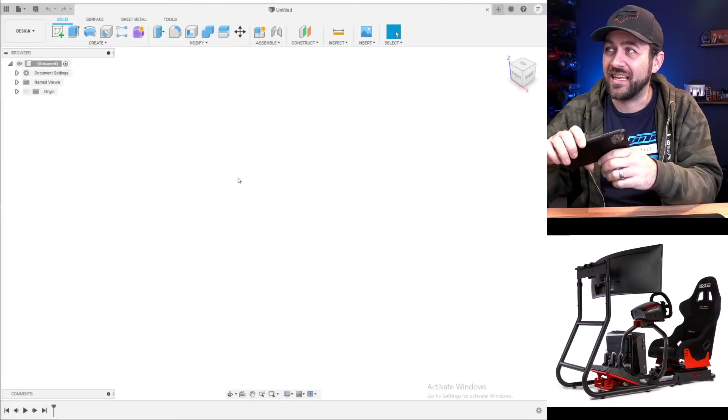Now I'm going to switch over to our Fusion example. This is the main screen of Fusion. In the inset right below me here, you'll see I've got a photo of a sim racer setup for playing video games. My idea is that we're going to draw up something like that, but we're going to make it a cell phone holder, so you can put your cell phone in it and that'll act as the monitor. You can use that for your scale garage, scale diorama, or just have it on your desk as a funny looking phone holder. But also it'll be a driver's seat or racing seat of some sort, so that's an option as well - you could just strip that out if you'd like.

You know, you could just strip that out of it if you'd like. We are going to do this as a multi-part design, so it'll all go together with multiple pieces. You'll print multiple pieces, and that's the overall concept of what we have going on.

Hopefully that made sense. This is going to be, if you're new to this show, I don't go through every step-by-step click of the drawing process. I kind of just go through it to give you guys an idea of how I draw things, more so than exactly every single step. It's a broad overview. I definitely suggest watching some good tutorials on using Fusion 360 if that's your plan, but maybe you'll pick up a tip or two here or there.

So here we go. Can I scale it up to really use it? You know what, you're going to need a bigger 3D printer, I'm guessing. So let's kind of just make some assumptions here. I'm going to start with a new sketch.

We click the sketch button at the top left. I'm going to go to the right plane, and do a little bit of sketching before we do anything, just to try and scale things out a little bit, give ourselves an idea. I'm going to think of a base, we're going to have this come up somehow, and then I'm going to use my iPhone Max as an example, and it'll pretty much work with anything. So let's call this thing, give or take, 80 millimeters tall.

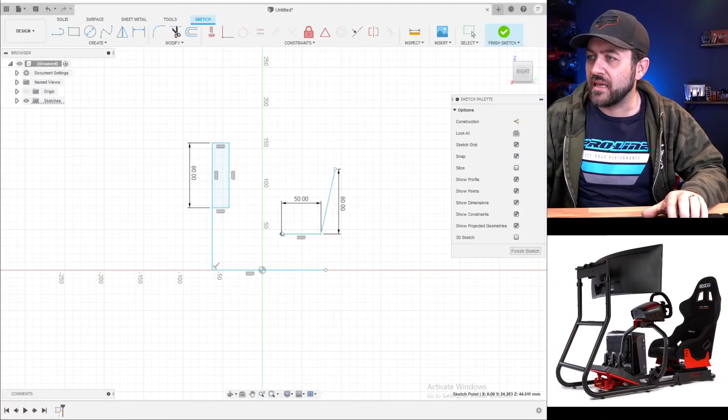And then a seat back - how tall am I? How tall would a high back seat be? 32 inches, something like that. 3.2, that's 75 plus 6, 80 millimeters, give or take. Oops, that's fine, we don't need to consider the angle. I don't have any angle on the seat bottom or anything like that right now - this is just for a bit of a sketch.

Now say we're going to have a steering wheel in here. What would a decent sized steering wheel be? 14 inches, so 1.4, 1.5 inches, 38 millimeters. I am going to adjust that one.

And that seems like too steep of an angle, so let's go 10. It needs to be somewhere in that range. I'm thinking something like that.

So this is the seat, steering wheel, and this will be our phone holder. We need to get our phone - the phone holder is going to have to be above that a little bit more so it kind of clears the seat. Something like that.

Hopefully that makes a little bit of sense. Okay, I'm going to end that sketch - that was just for my own visualization so I can get a plan of attack. I'm going to start a new sketch. We are going to start on the right plane again.

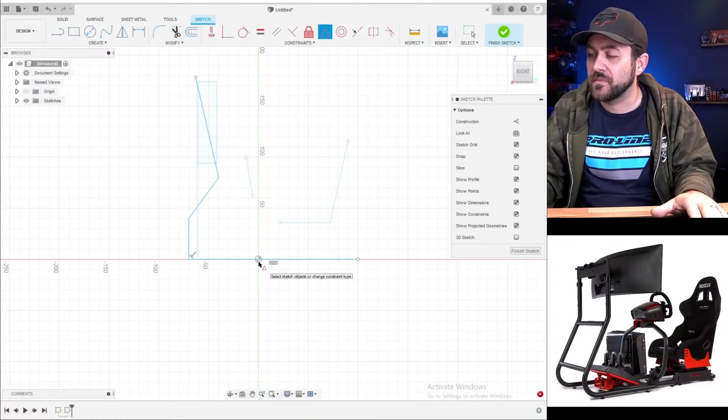And the other thing that I need to do is make sure that the base comes out beyond the top, or at least the center of mass of the phone, so that it doesn't want to tip over awkwardly. So 40 is fine there.

And we also want to make sure that this is going to fit within the bed of like an Ender 3 printer - that's super common, those are about a 200 millimeter base. So just want to make sure that everything sits there without any problems.

Let's do 180 millimeters tall. We'll go 30 - now we haven't defined any of these angles, and none of these angles are crucial, so I'm just playing around with it. That should be enough angle for the phone to sit without any issue.

Just add some brass - good comment, Moose Jaw. I'm kicking you out of the stream already.

So I threw that profile together. Let's throw some fillets in the corner - 10 millimeter, I'm already liking the size of it. Now that undefined a lot of my sketch already after I added that, but I'm not overly concerned about that. 90, there we go. So we're gonna throw one more in here.

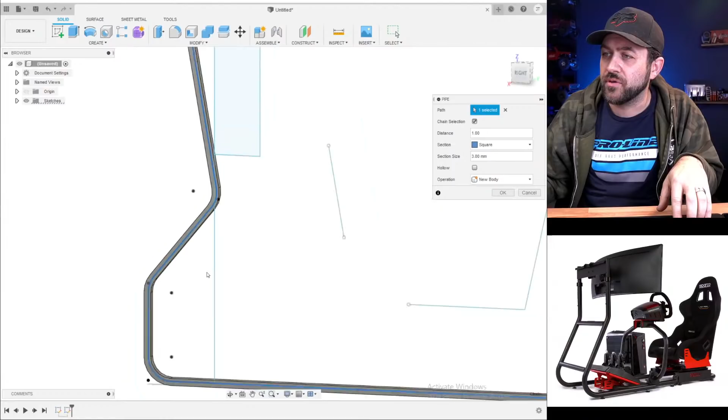That is not on by default, so we're gonna go back, grab pipe, and we're going to change that from circular to square. Then we're going to select that profile that we just drew, so you can see that's kind of a square tube design. Now currently that's a 3mm section - we're going to bump that up to like 5mm.

Actually, we're going to go more than that. 6mm is just under 1/4 of an inch. So, 6.5, that's just over—6.35mm is 1/4 of an inch. So that gives us that. Now we're gonna have that as will be either side.

I'm going to select that part and we're gonna move it. Now I need to create the 2 rails. So let's say that we make it 2.7 inches.

So if we move that 2.7 divided by 2 inches, will it do that? No, it won't. What is that, 1.35? 1.35, we moved that over.

I'm gonna do a move command again, or we could do a mirror command. We'll just do that. Drop down to mirror, select body, select that object, mirror it off of the center line.

So you can see none of this design is following the actual profile I created—again, that was the previous sketch. That was just so I could kind of get things into some sort of thought or reason. Now, of course, we need to connect everything here.

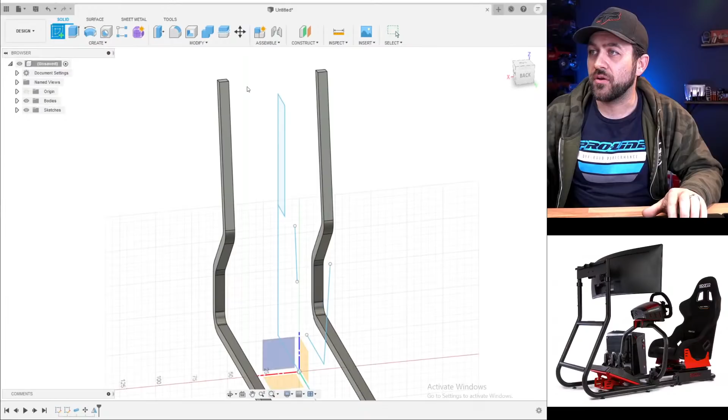What I'm going to do is we're going to start kind of at the top, and I'm going to plan on adding a couple of bosses. And then we'll add some around them. We're going to make those inner ones

2.6mm because those will be a threaded hole for a 3mm screw. So we're going to select both of those and click equal. And then we're going to make the outside, say 8mm. We're going to click equal and click on both of those as well.

I'm going to create a construction line by clicking L for line and then X to toggle it to construction. Make sure that it's vertical—it already was vertical. And just going to define it a distance off of 6mm off the edge, which is fine.

Now we do need to kind of define the measurements. 6 down is fine from there. And we'll go 6 up.

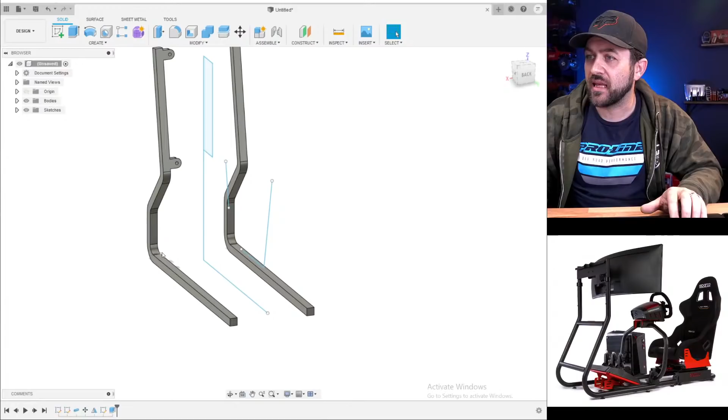So we've got that. I probably don't need anything like that down here, but I am going to need it along the base because we're going to need to come up with a pedal set as well as the seat base and all of that. So let's get it set up.

Actually, we'll probably do a mount for the pedal area up towards the front, and then the seat area will likely be more of a vertical tabs.

I think—yes, I did check if I had audio because people... oh, dang it. That happens to be the joke around here. I don't know how that happened, but people trying to freak me out that I don't have audio.

So 2.6, we are going to kind of mimic the design that we did a moment ago, up top. I'm going to make sure that it'll be a little bit different. I'm going to make those—none of these dimensions are critical. So I'm just making stuff up as we go.

Line between them, create some points, and turn off the construction. Two more tabs. We're good to go.

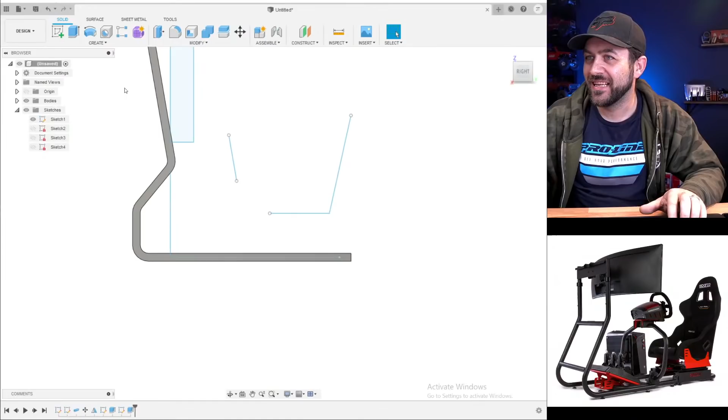And now for the rear portion, actually, I'm going to turn that sketch back on for a minute. We should probably make the seat base adjustable so it can slide. Just because we like to overcomplicate simple things.

We're going to go 8 again. Now, this one, we're going to raise up. I'm going to give myself a little bit more clearance. 25 and 40.

All of this stuff will, again, we'll start making all of our additional pieces here shortly, but I want to try and get my framework down. As we go, we'll definitely add in fillets and radii, possibly some more style to things, maybe some additional bracing, who knows? But like I said, these things usually tend to evolve as they go.

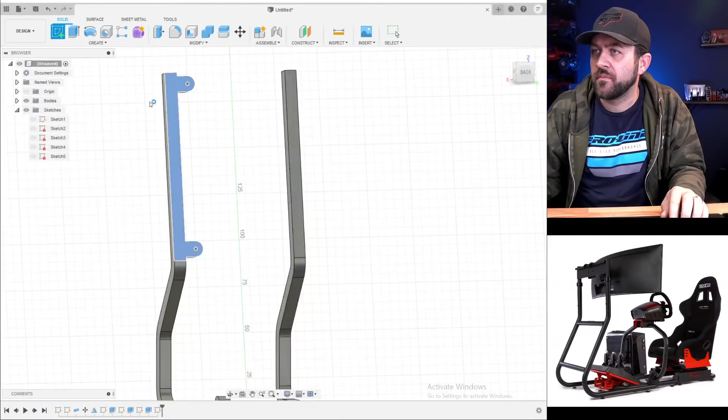Okay, let's do the phone holder next. Yeah, why not? So this doesn't have to be an overly complicated part, although that is typically how I do things.

So we're going to bring this just proud to the top of that, maybe 5 millimeters, again doesn't matter. We're going to do a collinear constraint with the bottom of that sketch and the radius return of that tube. Now you'll notice I drew this to the center line because my plan is to just draw half of this and then mirror it, that way I don't have to do as much work.

Now we don't need this thing to do the whole width of the phone. Really, we don't need to do much wider than the base as it is. So my phone is about 160 millimeters. But let's keep this - if we do 50, that'll be just past. That'll be fine, we can mirror that to each side.

Now we do need to add some 3.5 millimeter holes over the - you're gonna need some flathead screws for these probably. Actually, I'm going to delete that collinear because I'm going to need to put a foot on the bottom of this, and I don't want that screw head to get in the way. So we'll put 5 millimeters there too.

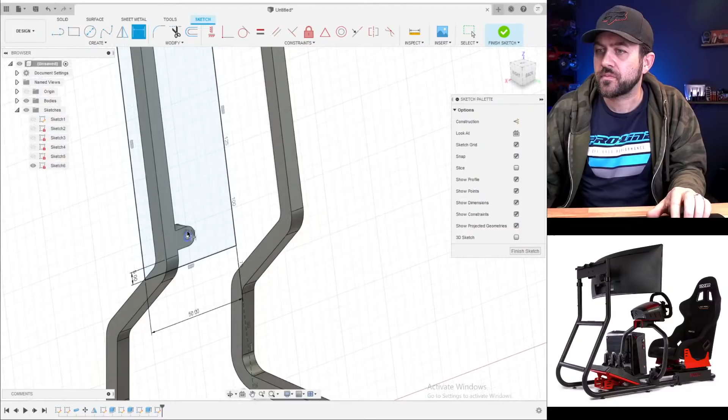All right, let's do an offset inside 5 millimeters, like that. And I'm going to do 5 millimeters out this way. I'm just kind of creating some geometry for the sake of creating geometry.

Lastly, I'm going to do a construction line set like that, and we're going to do 2 offsets. This, I'm going to do 2.5. I'm going to make sure that's not a construction. Hit OK, and do one more time, negative 2.5.

Okay, so now I'm going to hit Q, and I have to grab all of the areas of this sketch profile that I want to include. I want to make sure that I've got - all right, and I'm going to increase this distance from 50. We're going to go 4 millimeters out is all.

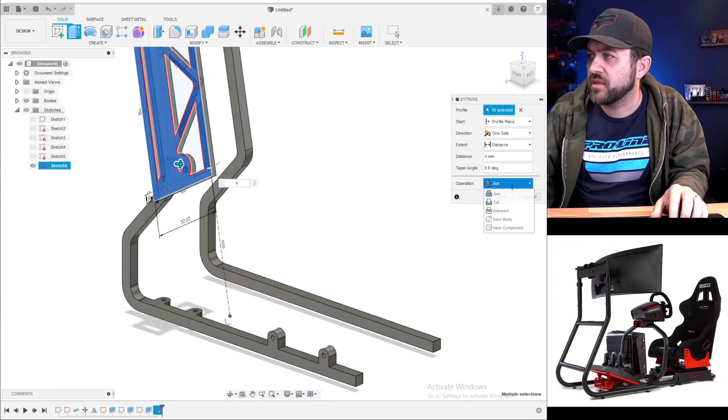Oh, but we need to make sure this is a new body, not a join. We got a little spot there we missed, but I'm going to go back in and edit that last sketch, change a couple of things to change our style. Added a little bit of width, just kind of, I wanted to add a little bit more separation here on the outside.

I still don't like that. I'm going to change - oh, that one's fine. It's this one here, I'm going to change that to 2 millimeters. Once we add a bunch of fillets and things like that, that whole thing will end up looking much different. So, actually I don't need to do that yet. Let's add the foot portion at the bottom.

Before we do it, I'm going to add a bit of color to this, so we can make sure we know the difference in bodies.

So I'm going to put a collinear constraint on that bottom edge. This is what is going to need to come out the thickness of our phone. Now mine is 12 millimeters with a case. Let's go to 15 to fit more thick cases.

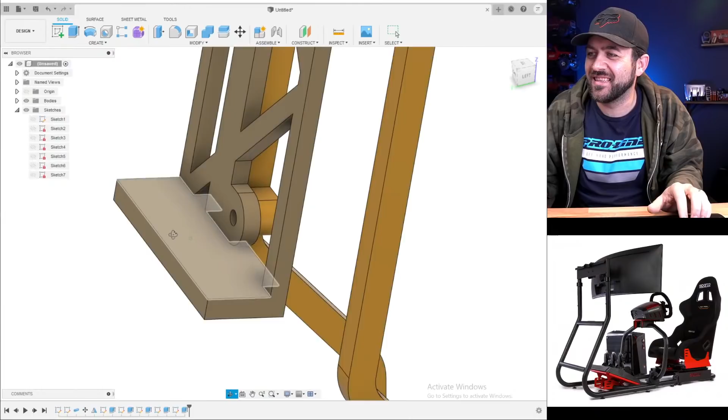And then lastly, we're going to put a lip on the front. I think we can get away with 4 millimeters without much concern. That we're going to need to come up - whoops, that's going to need to be -8, I guess. We'll go with 10, -10.

So we've created that. Now I'm going to mirror that body, selecting the body. False, I'm not going to do that yet. I'm going to decide to add the fillets on this thing first, so I don't have to fillet both pieces and all of the joints that would be doubled.

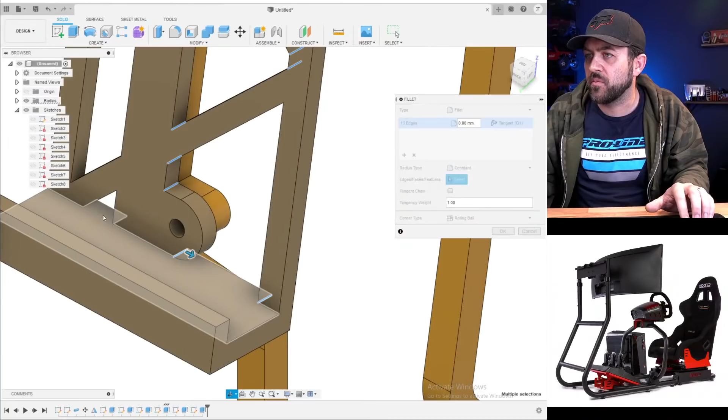So I'm going to go through and select all of these. There's multiple times you could do this - you could do it in the sketch, you can do it in the solid. Some are more of a pain in the butt than others. Either way, there can be a lot of these lines and they can end up taking a good amount of time. But we'll change the look considerably if you spend some time selecting and getting rid of a lot of those hard edges.

So what's 3 millimeters? Oh, it's not gonna... okay. It doesn't want to do it because I'm guessing there's some of these that are too small and it wants to close up the joint too much. So I'll do it one section at a time.

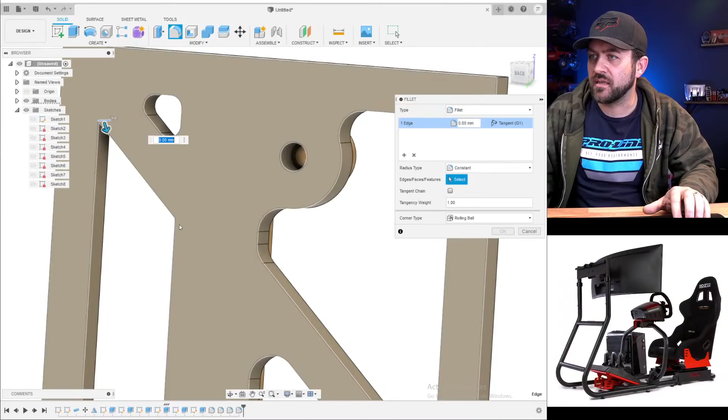All right, you can see it helps, it starts to clean things up quite a bit, fairly quickly as well. So if I do 3 here, yeah, that's the one that's starting to close up. So we're going to do 1.5. I kind of had a feeling that that was the area that was causing me issues already.

And we've got a duplicate of that one down here, 1.5. It didn't grab that corner. Let's redo that one more time.

Okay, so now I'm going to mirror that. That body, mirror plane, we'll just select that edge. I'm going to hit new body rather than join so it doesn't connect with that other side. Then we're going to combine both at once. There we go.

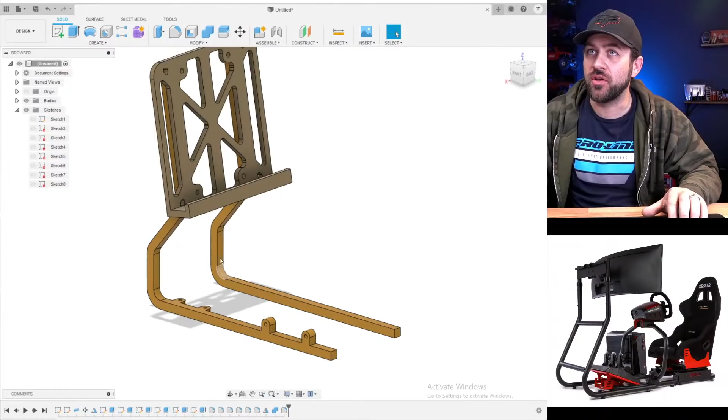So there's going to be your new phone holder. Now we need to do the pedal set, the chair, make sure whatever kind of chair base we do, it's got some...

Save before mirroring, I should save just because. What were we calling this? Sim Racer phone holder. So there we go. All right.

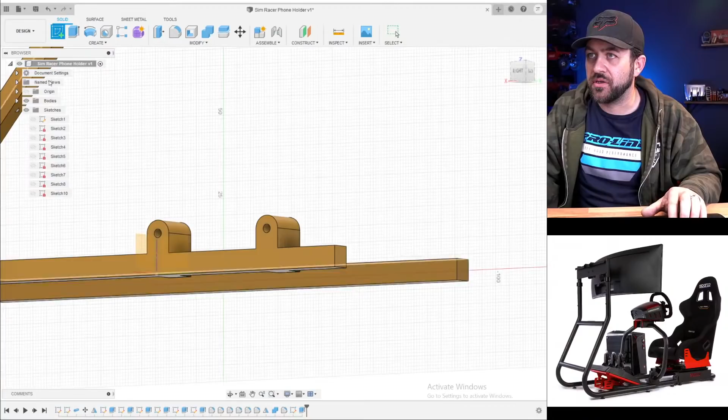Now we're going to do that because I want to cut it from the outside. I want to kind of have the outside of the rails flush with the... there we go. Now we're going to bring that in. Yeah, we're just going to bring it in negative 6.5 since that's the thickness of the tubing.

I told you that footprint gas pedal would come in handy. Hey, you know what, you're not wrong. We have a full pedal assembly, I believe, from a previous model that may work out just fine tonight. So we will go back to that.

Use the Woods Runner seat. Oh, could use the Woods Runner seat if people wanted to buy it. Insert derive, we go down to Woods Runner. Did I do that all separately?

Floor stamp, rear firewall, nose. I don't remember how I titled it or anything. It was like, I think I did a whole bunch of the interior all together, actually.

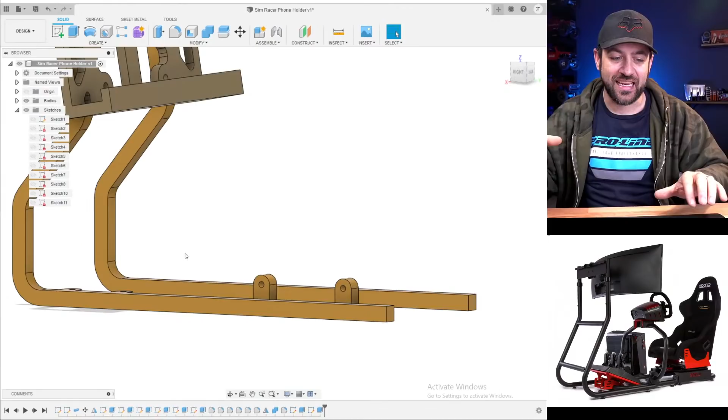I'll make this so that there's a solid base and then any seat could be bolted to it, or double-sided taped or whatever you may have that could come in handy. So, 3.5.

Oh, actually, I'm going to undo that. We're going to make these slotted because everybody loves the slots. Slot, slot. Turn off construction, 3.5.

All right, now we are going to select the line, select the midpoint, and constrain those so that they are equal. Lastly, we're going to do 8 millimeters of adjustment.

Oops. We're just going to do an equal so that... yeah, why isn't this one? Oh, that point did not want to. Oh, nope. Oh, I'm just going to hit P for project so we can grab that. Sometimes it does not love the little things.

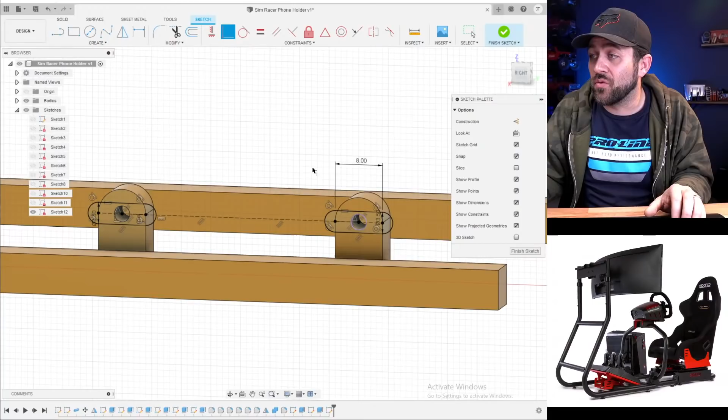I just don't want to assume that people have an item already, other than a phone. I'm assuming you all have a phone, but you might need the phone to take the photo of it. So maybe you're going to have to borrow your wife, girlfriend, or kid's phone.

So we're gonna work on, there we go.

Okay, who has Wraith seats? I just have a box of drift cars, have seats? I didn't think drift cars had full interiors.

But that is good news because I'm sure that the seat that I draw isn't going to be beautiful. I'm going to open up that original sketch or turn it on so I have an idea of where I was previously thinking this seat base needed to go to.

We're going to leave it a little shy of that height specifically, but add some tangent connections. I'm going to do a vertical line, that was purely to give me a good area to dimension off of. Did a 20-degree on the front side and a 10-degree on the rear side.

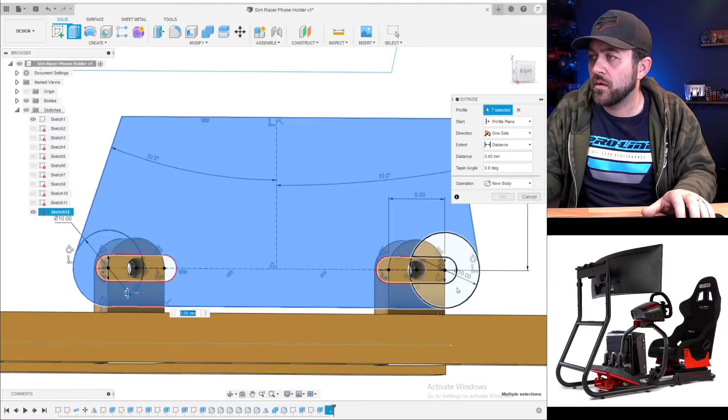We probably won't pull in another one just because I don't like using somebody else's work like that on a stream, especially. So we're gonna go 5 millimeters out.

And at this point, now I made that a flat base, which is probably not what we want. We probably want it to have some angle in it, right? So I need to go back and adjust that sketch.

So right there is our horizontal constraint, you can see that little line segment. I'm going to delete that. And then I'm actually going to delete that, that was a perpendicular constraint right there. And it's still, I need to take off that 20. All of these things that are defining... oops.

So I'm going to throw an angle. There we go, drag it down for a little bit of an angle, and then I'm going to be able to do, let's say 5 degrees. That's reasonable, I think. 5 degrees might be a little extreme even, but probably be all right.

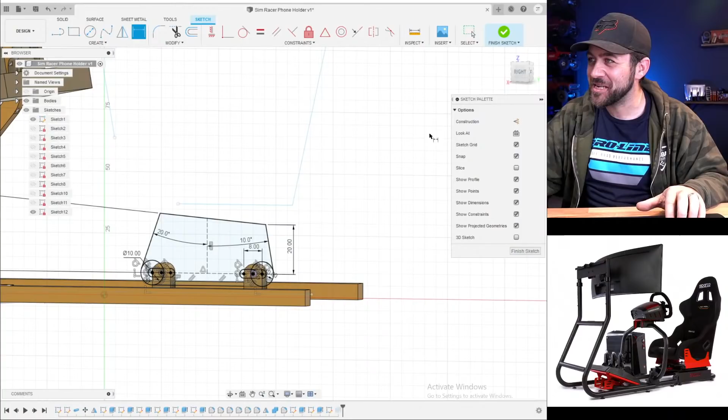And so, finish that sketch. So now it adjusted our seat base to have the angle.

Throw a small amount of fillet on it already, just to give us a taste of style. Just a taste. Now, I can make this so that it's a full C shape, and I think I'm going to do that. Yeah, it won't really, we'll still be able to 3D print it. It'll actually make it a good example too for something to print, because it's going to be one of those examples where you can orient the print in a different way and save yourself a lot of time and energy.

So we're going to, now this part I need to extrude it, but I would like to extrude it to the right plane. However, the right plane doesn't show up. So unless you click on the origin eyeball up there, and then those little things pop up, and then you can click on it and it'll take you to that point. Bam. Let me turn that back off.

So now with the position of that steering wheel in the photo below me, it is not attached to the steering or to the TV area, but I think for our purpose, we're going to build that whole steering column off of the phone holder, because this is a 3D printed scale item and not an identical model to a sim racer. So sue me.

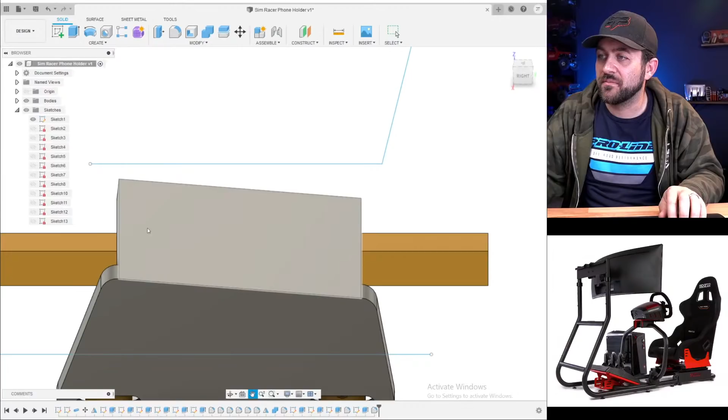But let's, before we go, add some of that. I'm tempted to want to put some decoration in this, but at the same time, I think I'll leave it just to give it a flat base so you guys can attach either the seat that I'm going to draw, which is going to be top notch, or give you an easy way to mount whatever you plan to do. So I am going to mirror this body already.

And new body, not a join, because otherwise it'll join to this whole outside part, which I don't want. Or it could, maybe it wouldn't, I don't know.

Hey Josh, my girlfriend got me one of those shirts for Xmas. Oh, nice. The Proline shirts are really nice too. Put HD on it. Oh, we will definitely put HD on it. We'll have to figure out a place.

I might have to go in some oddball place on this one, because we're not going to have a lot of nice big flat areas. Maybe I'll put it on the area where the foot pedals will go.

So I don't know that we're going to need any other cross braces between the two sides, are we? That's going to be plenty.

I might add one other one. I'm not going to mirror it yet. Side of the seat stand, great idea, Phoenix. I like that one.

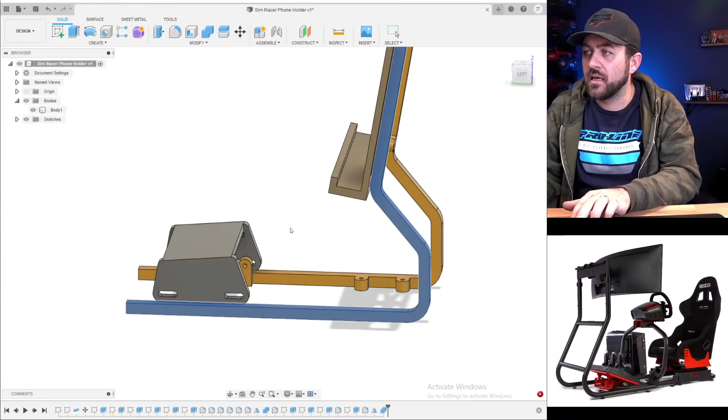I'm going to open up the bodies. I'm going to delete that second rail and mirror the first one again, just to give myself an updated and complete look at what we're going on.

Josh missed a good opportunity. A shirt saying, I wanted a VS410 Pro for Xmas, and all I got was this trash. Nice, I like that. That would have been good. I agree, but I'm not that clever to come up with nice shirt designs.

Okay, now I'm going to work on the pedal base. One thing I'm noticing already is that here I've got these holes sized to be the threaded holes for cup holder. That's a good idea, Darwin. We'll add that.

These are sized to be threaded. So that means that the screw would likely have to come from the top, otherwise it wouldn't sit level on the ground. However, there's things in the way of almost all of it, so that would be a tough thing.

So what I'm thinking is I'm going to adjust that sketch and make those sized for a 3mm pass through. And I have an idea how I'm going to. So this is going to be 3.5 mil, and same with that one. Hit finish.

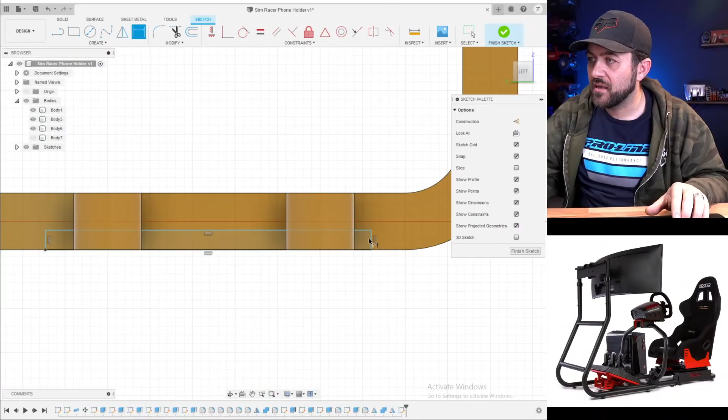So we're going to do 2.5mm tall. I'm going to use P for project to grab those. We're just going to do collinear constraints. This is unnecessary, an undefined sketch would have worked fine, but I'd rather do it the right way. It's grabbing that whole thing, so we're just going to turn that off.

Oh, it did an offset face, that's not what I'm trying to do. So we're going to cut through all of that like so. And now I don't have that mirrored on that side properly. So that's why I don't love to mirror those two things.

Don't say we need supports. No, I don't, these pieces shouldn't need support. Well, these little areas right here are going to need some supports, but that's going to be about it. This thing's going to print pretty well without any of that. The whole thing, I kept that in mind the whole time. This is going to need very, very little support. That is my goal most of the time when I'm designing, is try to minimize supports.

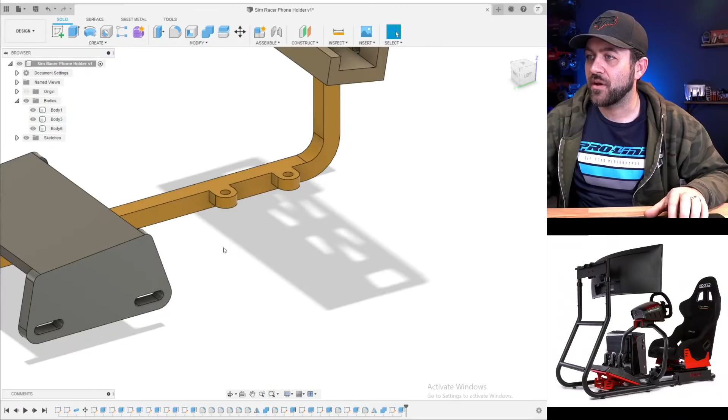So I am going to delete that just so I remember to mirror it again though. Now we're going to work on the pedal base. 2.5, these are going to be the threaded holes. They're going to, like I said, thread up from the bottom.

And a couple of constraints. We'll bring that in, but I'm not going to bring it all the way out to the edge. We're going to leave it shy, going 3mm from the edge.

Josh sent Dale's truck to Phoenix. I don't think so.

So now this, I do need to get that. There we go, there's my origin. So we're going to do... we're going to extrude. Oh, we didn't grab the full inside of that. Otherwise we wouldn't have gotten those threaded holes. So we're going to extrude that up as a new body.

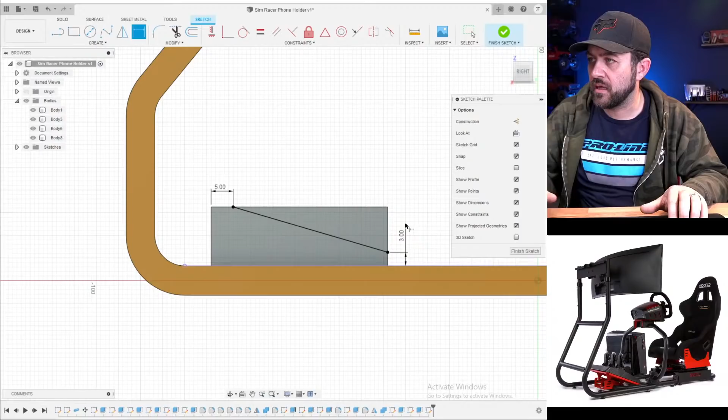Let's go like 13mm. Don't freak out yet. We're going to define a cut across that whole thing. Five millimeters there, and we'll say 3 millimeters from the base. And then cut through that whole thing.

Actually, I'm going to rewind back just a little bit, and I'm going to do a bit of a cap on these. Ah, we still pulled into that one, but that's okay. I don't love that. That really doesn't give me enough threads to attach it - it's only going to give me a couple of millimeters.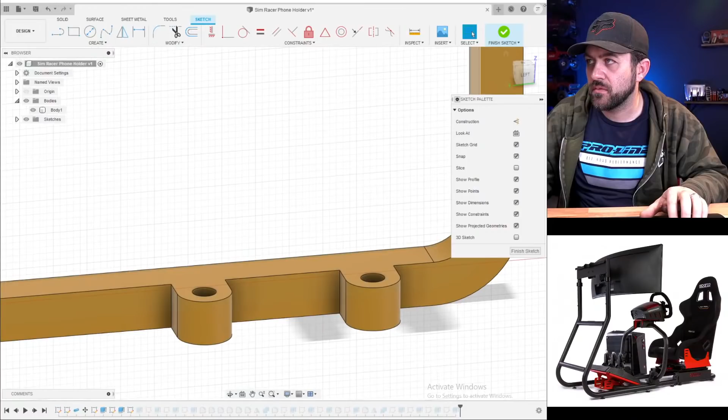Let's see, do I have a better solution for that right now? I guess we can go back in this history tree and... oh, no, further back, further forward. Where's it at? Nope, further. Okay, we're just going to pull this back until it shows up.

What I'm trying to do here is... I'm going to move this rear one further forward to try and give me some more threads in the... that'll be alright.

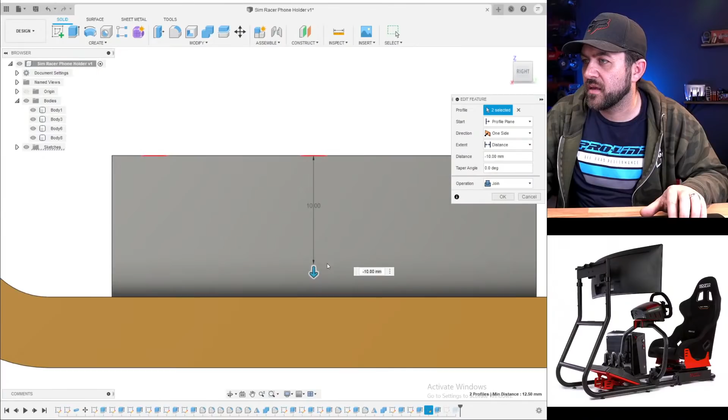And now I'm just going to do an inspect. That's still only 3 millimeters of thread, but I can actually adjust. Some of this stuff is not... God, why do I keep selecting the same one? Must be this one. Go to there, that'll do it. It's the little stuff that can be annoying, but that'll give us a little bit deeper thread on each of those to help secure this better.

And now we can... okay, I don't know if this will work since this was designed to work on a flat base. We could always remove or undo the derive and adjust it in here though. So let's see how that works.

I should have put an actual degree number on that. What's that going to be? 15.5. 16 degrees is close enough.

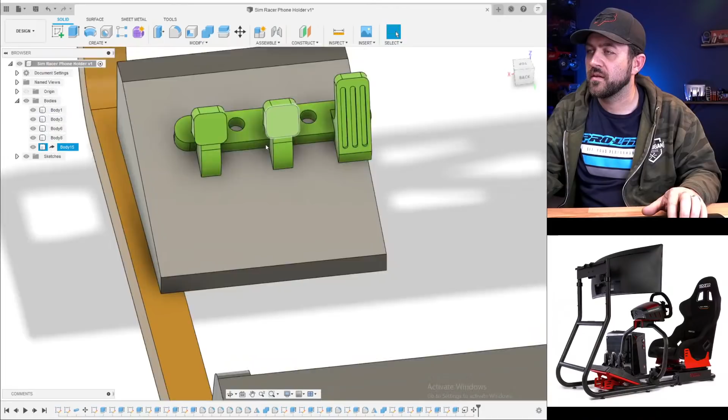It's awfully narrow, we could scale it up a little bit. Because remember, this is only showing half of the foot base. Let's mirror that for sake of...

I definitely think we need to scale this up. That's the reason that I'm also thinking that, well, no, I kind of did some of these dimensions off of what I figured 1/10 would be, but that needs to be bigger. So we're going... oh, still need to move it.

Over there. Now let's do a modify scale, select the body. How's that look, 1.5? That looks more reasonable, we'll hit OK. I kind of like that.

Who is messaging me?

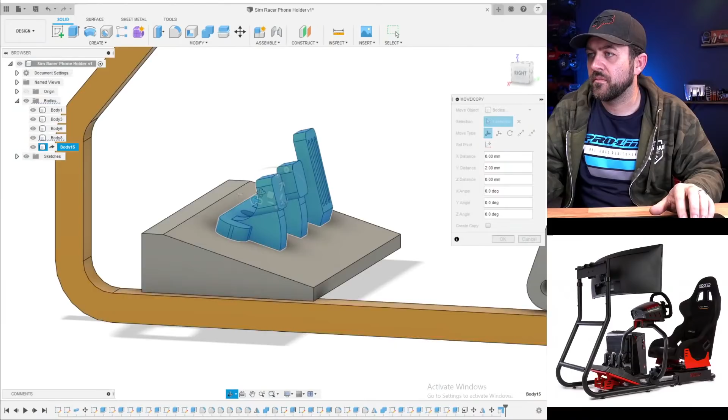Maybe scoot it back more so we've got... if you message, okay, everyone message Josh. If you do that, I will block you. I will not feel bad about it in the slightest.

Now you see this little black arrow that we have there, that's a derive link. It means it's linked to the other file. So what I'm going to do is hit break link, and then we can modify this thing without any concerns. Oh, I'm going to turn that off.

The reason I want to do that is I need to do a 3.5 millimeter hole here. Wow, that was already almost 3.5. Huh, actually I'm not going to adjust that then, it's just not needed. But I wonder why - I must have used, like, it was either threaded or M2. 2.6 millimeter.

And we're just going to drag that down through. We'll go negative 12. So that gives us the holes to mount those pedals. Saved ourselves some time there.

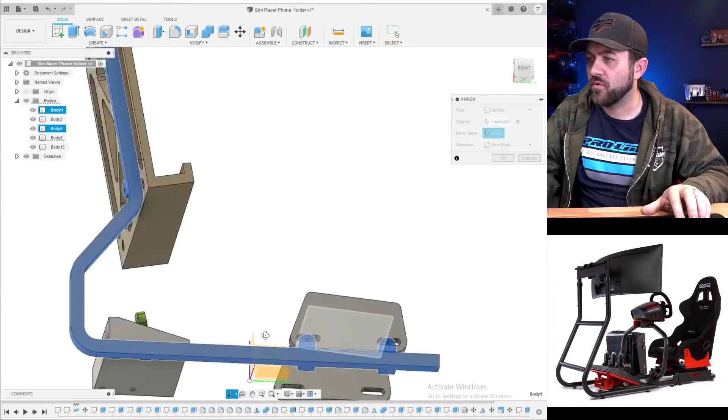And I'm going to mirror that part for like the third or fourth time. I knew I would do that, but it helps for visualization.

Hey Josh, will you be posting any parts you made for Becky? You can have any of those parts. They're just so specific for this truck that I didn't figure anybody would really want them.

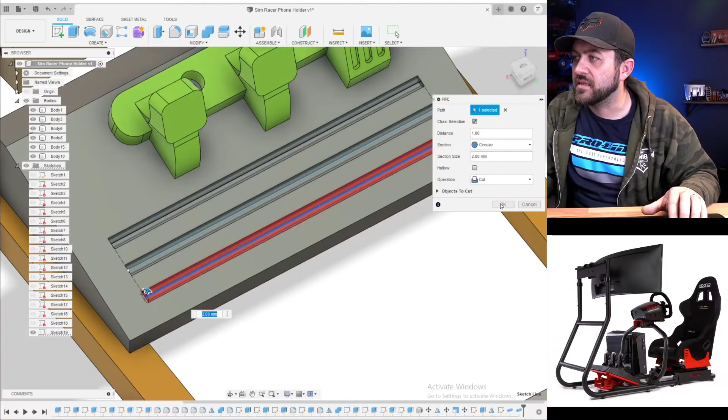I'm using the pipe command to create these kind of ribbings, ribbed cuts, riblets, traction lines.

Smooth them out. Select. There we go, a little bit of detail.

Now your shoes won't fall off. Riblets. Yes, I like riblets. McRibs, even better, the McRibs. We could put the ever so smallest H on this one and D on that one, but we're not going to. The McRib is back. I wonder how long it's been since I've had a McRib. I've definitely had one, but it's been a very long time.

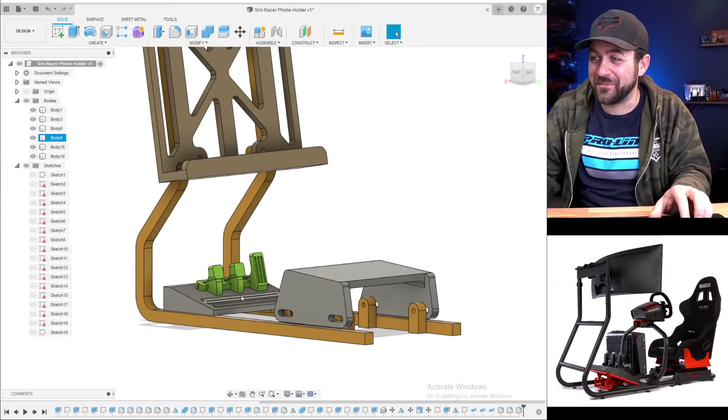Okay, I'm just going to add some fillets there while I'm staring at them and not liking that it doesn't have them. Kind of thinking we should take a bit of a cut out so it's just got the McD's. It's gross, it's not the best. Not the best for you, but sometimes it's what you need. Not the hero we wanted, it's the hero we needed.

So this seat base, while it is separate and will brace between them, I don't like that it's going to... I think I'm going to add another brace underneath, or maybe somewhere in this area in general, just so that it really makes things nice and sturdy. Because with the seat there, I feel like everything's just going to be a bit too flimsy for a scale 3D printed sim racing rig. So we should definitely spend more time on that. But first, there's more, let's do the seat.

Now, I'm not gonna lie, seats are not easy, at least not for me. They've got organic shaping, and that is not always the easiest thing.

And do that, and then bring the headrest up. Now we're gonna do, let's say 4 millimeters thick, something like that. And then I don't necessarily need it to exactly fit, so we made it straight lines on the outside. Let's do a spline for the inside, because that'll help make it less geometric, robotic looking, like most of my designs. So we'll do something like that.

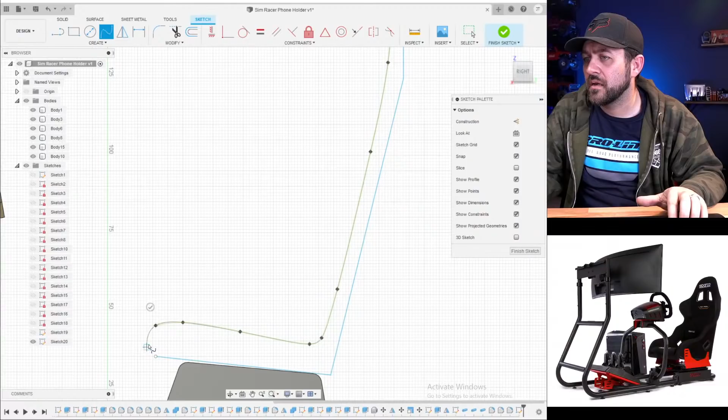Okay, and that was too thin, so I can just kind of... I freaking hate drawing this type of stuff. And that's way too tall. So we need to drag that down and drag some of these points into check. It can be a little bit taller than what I initially will do. 5 millimeters there.

And it's going to be like a Buick racing seat with that much cushion in the bottom. Hoovy would be proud.

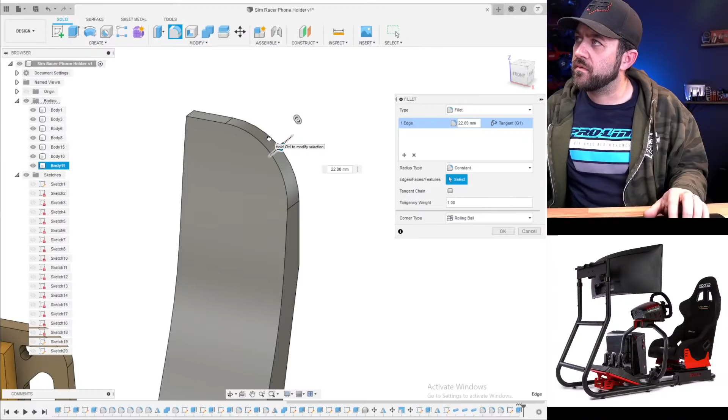So we're going to put a bit of... actually, no, we're not going to do that. I'm going to do a sketch on the back. I'm going to offset a circle, something like that. Add the top cut.

And now we're going to need to add things like the side bolsters and all of that. Again, these are just super oddball shapes that I don't love drawing. This is definitely my weakest skill set in CAD. I am not good at this by a long shot, so everything here is nothing that should be looked at as actual advice. If anything, you can look at it for comedic value. If you thought the seats in the 50K truck were ugly, wait until you see me do a racing seat.

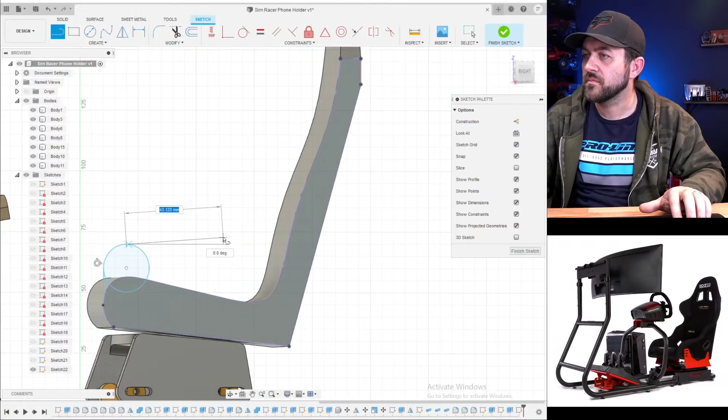Let's see this. We're going to bring out some bolstering. I have ideas on how I plan to try and make this look halfway decent. It's not going to happen, but they're ideas. Oops, I hit the wrong one.

I'm going to do this as a separate body at first, and then it'll allow me to kind of chop away at some stuff. Just grab a racing seat off Thingiverse.

I don't like using other people's models on streams. It's just not a great practice. Technically the channel's monetized and all that, so it's not a good thing to do. It's not a habit I want to get into. By all means, you guys can do it, but it is not something we're going to do for this broadcast.

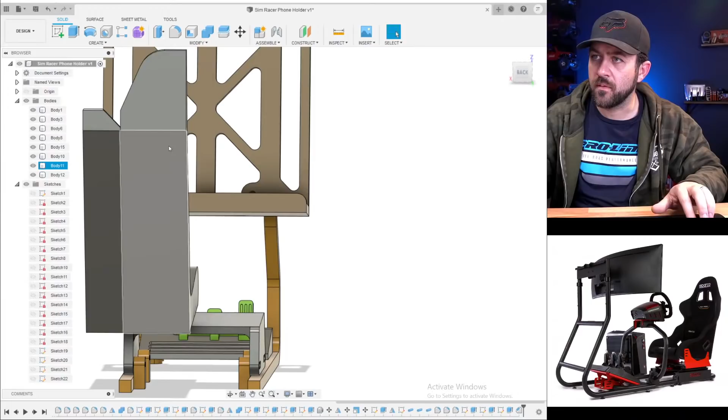Do that. Before I do that, I'm going to go spline again. And then project those. Now let's see what that does. Does it on that side? Okay.

Oh, I'm going to undo that. Back to chamfer. I'm going to deselect tangent chain. I decided to combine them to try this at least. That's still way too much. Undo the combine.

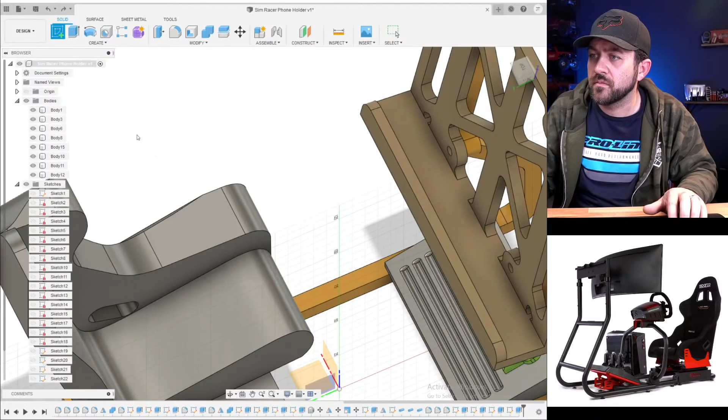Okay, we're going to try and do another one of those kind of fit spline cuts, just because it tries to give me a little bit of a shape to it at least.

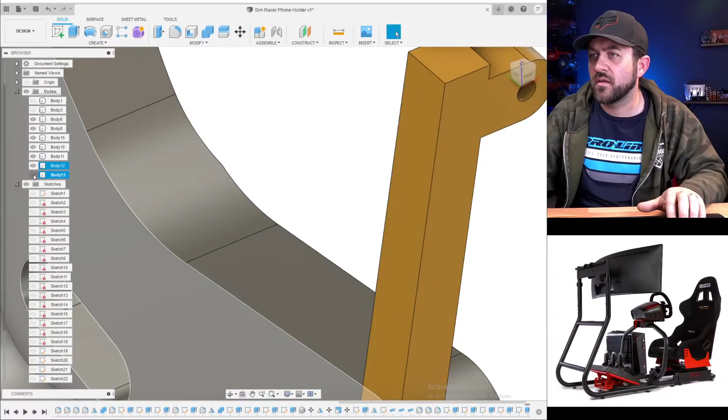Do that. Did it create a little straggler? It did. But I think I can just delete that body. Nope. Because it is still attached. Damn you anyway. All right.

Do I have anything that's causing it? I can't tell. I'm going to edit that sketch. Just add myself in a little bit more.

And we're going to try one more of those cuts from the inside, and that's going to probably be about as much as I plan to try and screw with that for the evening. Before we just say it's close enough, you can use a seat that you have, you can download a seat. I don't care.

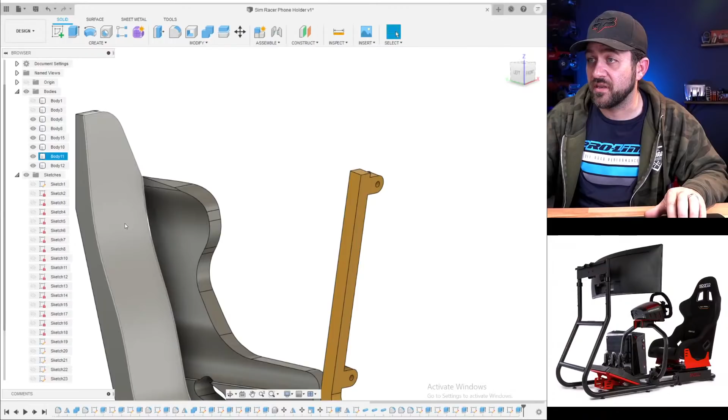This is a whole different type of modeling. It's more organic style. I was trying to fillet that and it's just not wanting to fillet. This is the worst. And I don't feel bad about this sucking so hard either, because like I said, I'm awful at this and I'm well aware of it.

So I'm going to throw a bunch of, screw it, all right, I'll screw with that later. I've done enough of it at this point that I can mess with it and get it to, I can keep just like filleting around until it turns into something, but whatever. And it turned out way too big.

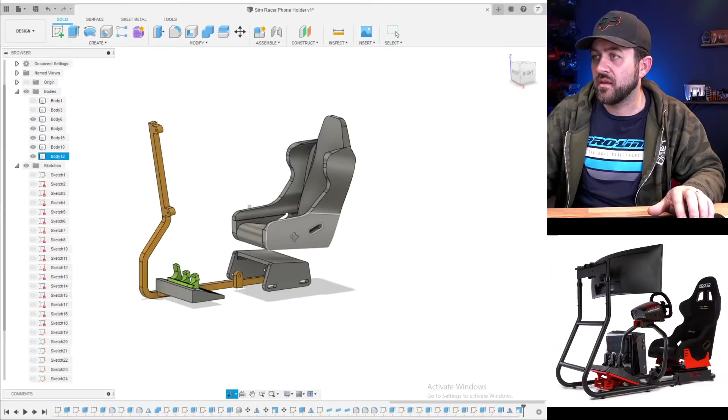So at the same time, I'm just going to grab the whole thing and go 0.75. Nope. Non-uniform. We're going to go 0.75 in width. 0.7 maybe even, yeah, I'm okay with that. And then in height, I'm going to go 0.85. Yeah, that got it slendered down.

Another one of those things that like when you're drawing it and it's okay. So I still don't like it. Front to back. There we go. It's getting there. Again, find your own damn seat.

We'll work with that for now. I'm going to turn it transparent just because you can look past it then. It's like it's there, but it's not there. Don't look behind the curtain.

Wouldn't it be easier if you had that scale driver? Oh, you're pushing it, sir. Maybe it would. Well, let's see.

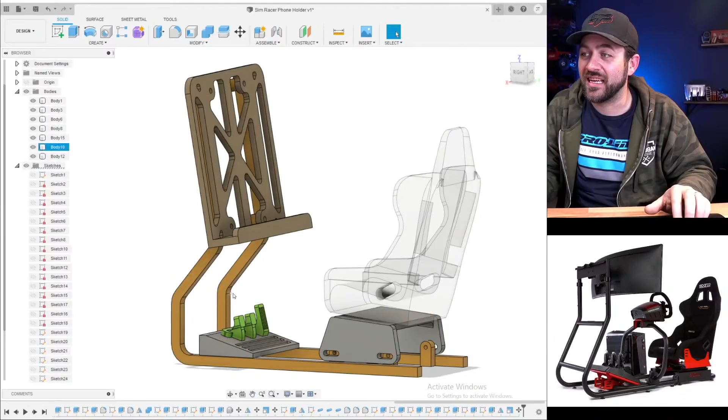Mounting holes. Need mounting holes for what? For the chair? I mean, you can put a screw through it if you want, or I would suggest double-sided tape, because depending on what seat you use, it could be a million different types of mounting.

I'd use the RC four-wheel drive PRP weight seat. Yeah, I mean, honestly, those seats are great. I've got them in that Woods Runner there, which belongs to Ben. I'd highly suggest these seats as well. They're pretty much perfect. They look really good, and they were cheap. A-Main carries them. So, a great one.

Need mounting holes for the seat. Yeah, I don't think you do. You could use some double-sided tape without a problem.

Now let's get the steering wheel setup all done. We're gonna have that come off of the bottom of this. I want to make sure that it prints easily. So we're gonna do like a 3.5 and a 10. Get that off of there, 10mm off the center line.

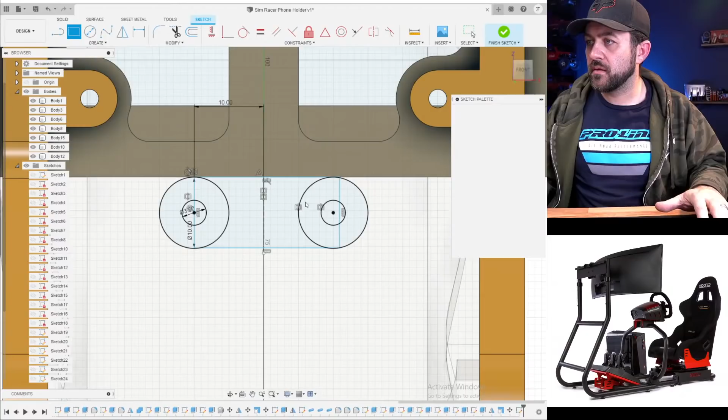And we're going to mirror those items to the other side. This is just going to basically be our mounting points, or mounting point for the steering wheel setup. And lastly, we're going to make sure that are in line. Oh, I don't know why I didn't bring that all the way out to the edge, but that's fine.

Do 10. Give this a mounting point.

Can you extend the seat back to the other body? Wait, what? Oh, I don't know. I don't know what part you're at. I think we're past the seat now. But no, didn't want to because it was all curved and everything.

So now let's work on the steering wheel. Normally you have the unit that gives you the force feedback, or just the housing for it itself. So I'm going to do, I made this all the way back there. I don't really know if I want it all the way back there. It might take a little bit.

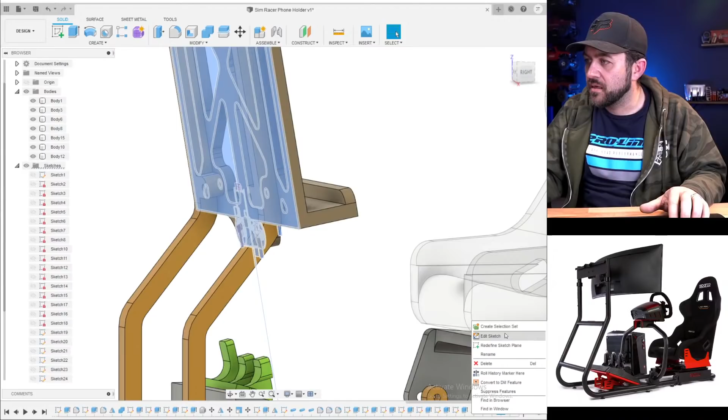I'm going to modify that sketch plane. So redefine sketch plane, and then I'm going to select the front of this and hit OK. Edit sketch, and whoops, it wanted to throw my, we're going to undo that. We're going to try that one more time. Edit sketch plane, I'm going to select up here and see if that... yes, that worked. So that allowed me to move that feature.

Now I'm going to just extrude it to the front. I'm going to turn it to two-sided, negative 4. So it is going to take a little bit of support on the back side to get this thing to print, but I think that'll be a little bit better.

So now let's build the portion that's going to... we're going to do an arc, 3-point arc, kind of put that across the top. Go straight up from those points to capture that, and make them equal length.

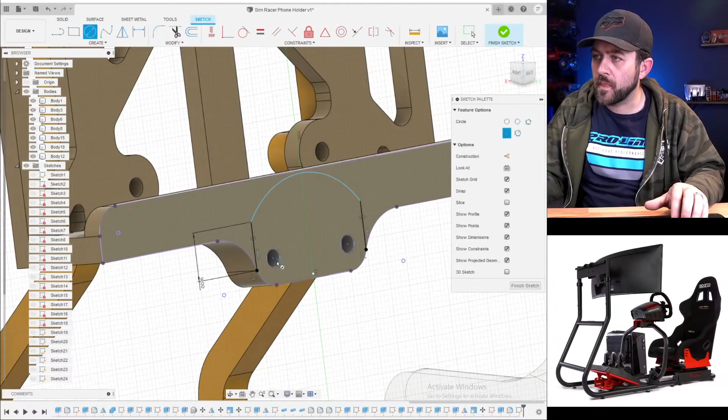Sure, 9. We're going to put our 2.6 millimeter holes so that they're threaded.

Drag that out, you want to come a little bit further. Once you get the steering wheel on there, it should be about in the proper position.

It's going to be a new body. Hit OK. I'm going to bring that appearance menu up and drop that on that piece.

So let's do a slight kind of taper cut on this thing. That maybe we don't do the whole way. So yeah, like there. Okay.

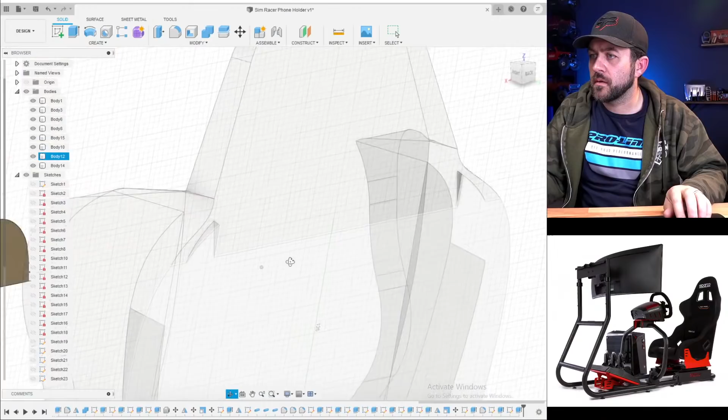The only thing I'm going to do, I'm going to put a small visor kind of portion on the top of it. No, I'm not, I lied.

I'm going to cap those. And then we need to put a hole to mount the steering wheel. What have we done steering wheels on? Josh, put a bearing in there so the steering wheel can rotate.

God, I'm such a sucker for putting bearings in things. A real spinny bearing. I kind of want to do that. Why do I want to do that? That's so unnecessary.

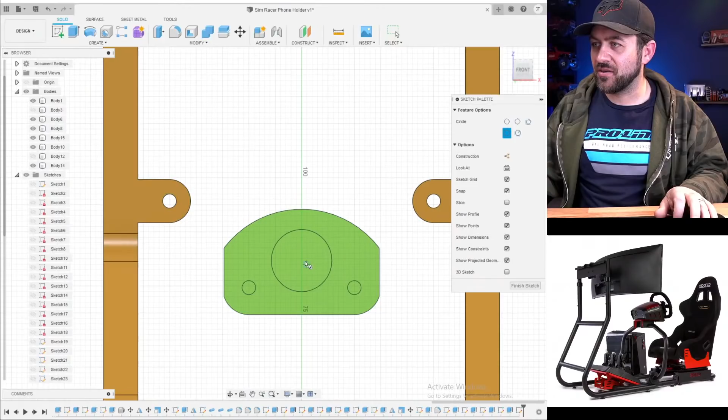11.5. 20. I'm going to do a secondary cut on here though that's larger so that it's not so difficult to get a bearing in. Make that like, yeah, 15.

Did he put a bearing in the refrigerator? I did not. The refrigerator did not have a bearing.

I went 20, so I'm going to go negative 16. So now you've got a 4 millimeter pocket in there for a bearing.

Now we need to make sure we're at 1 point. Actually, the inner race is what, 5 millimeters? So I need to be at 7.5 total diameter, call it 8.

Okay, how about a pen spring for a seat so you can have an ejection seat? Yes, we keep overcomplicating unnecessary parts. I'm well aware and I apologize. Okay.

So that is going to be our bearing-supported column to start, but I need to do a... we're going to do a 7mm steering column so that it sits properly on everything. We need to have a 2.6mm hole through it.

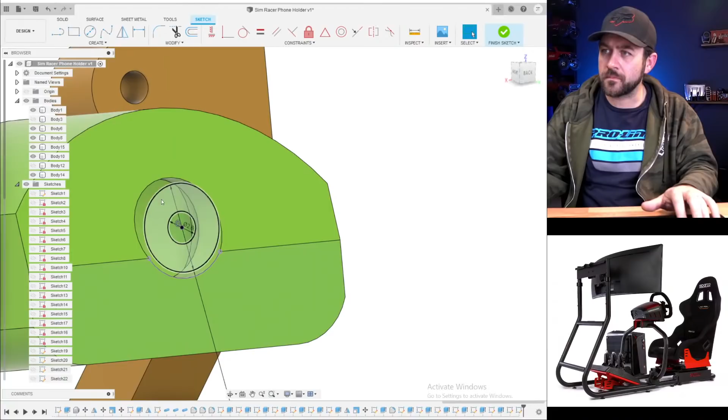And then we need to extrude that out by 2 in that direction. It needs to go to that in that direction.

Now, the problem is that we don't have something that actually goes through the center of the bearing. We almost need that, and I don't want to make it all one piece because you only have 5mm. If I do it, what will it look like? If I go 3.5 and 4.5, yeah, you only have 0.5 millimeter of actual material. Trying to make it so you have the actual shaft and you have a 0.4mm nozzle on a 3D printer, that's just not enough. Urgh.

I don't want to go to a 10x15 bearing so that it's easier, but man, that's a tough one. That is a tough one. How do I make this so... okay, it's okay, we're going to figure it out. I'll figure it out later.

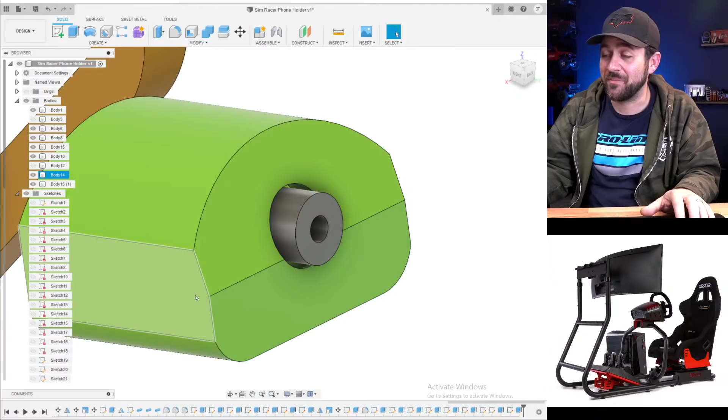So that brings our column out. We need to actually do the steering wheel portion though. I'm probably going to do 2 steering columns, one for a bearing and one that has a spacer so you don't have to use a bearing in your steering wheel for ridiculous reasons.

Now we're going to do a 3-spoke wheel, unevenly spaced though. Something like that. Minus 2.5 down. Minus 2.5, and same here.

Okay, I'm going to define that angle. 115. 110, a little flatter. And then I'm going to mirror those based on that line. Throw a hub in the center, it's 10.

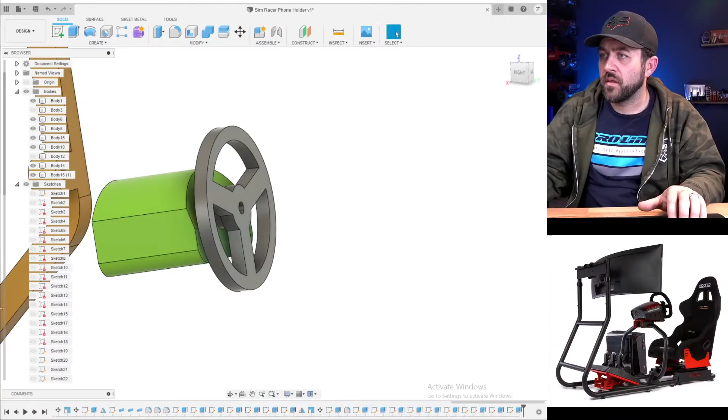Three up. Very simple on the wheel.

Oops. God, I hate when that happens, when it all of a sudden jumps over and selects a bunch of other crap you didn't want.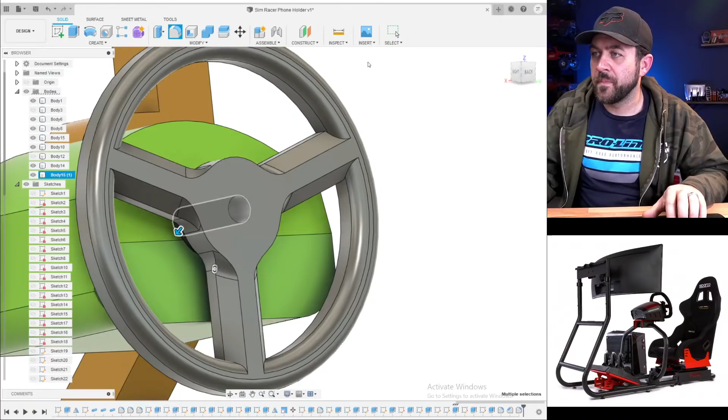There we go. Can you make that a chain steering wheel? No, absolutely not. I would have a much easier time modeling that than I would a driver's seat, I'll tell you that.

Okay, so we're an hour and a half in. We've hit the main points here. Now, I'll probably go through and do a few other things, but I said I wanted to get into the actual Cura part of it.

Chassis left, phone holder—I'm just naming my actual models at the top. Seat base, pedal, because I want to show you how I look at it when I bring it into Cura itself. I'm bringing the seat in, even though I hate it, I don't like it, I wouldn't use it. Steering base and steering wheel.

We can add other things if you guys want to hang out longer, but I want to get these items saved. Normally I name these things all with consistent names, but again, like I said, I want to get this rolling so you guys can see what's going on first.

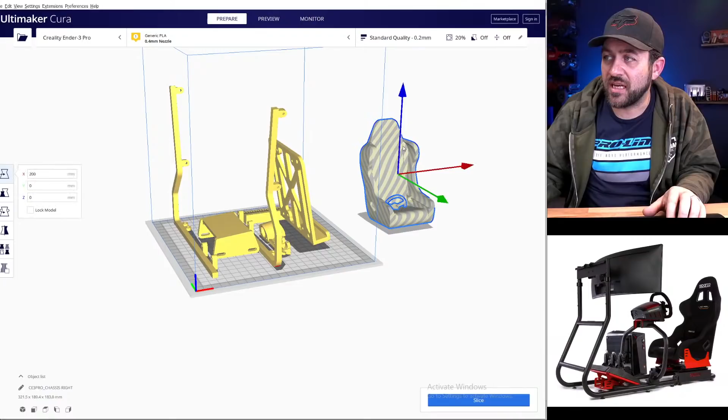Now, obviously, this is too much for one base. See, even it rejects the seat. I'm fine with that—deleted, gone. Now, if you've ever just brought in a file and then you get this and then you hit print, that is definitely just not the most effective way to do things.

When you click on a model, it obviously gives you these 3 arrows. You can kind of click and drag those around. Let's start with that. So this is set up as an Ender 3 right now.

I'm going to actually delete one of these sides because I don't think that we're going to print both at once. So I'm going to drag that over, but I'm also going to hit the rotate button and it pulls up the orb, and then you can drag that and rotate your parts. Hopefully you were already familiar with that. That drags it to 90.

Now, there we go. Whew, it still fit. So you can see there, it actually puts that base in where it needs it.

Now, the other thing is like these pedals, you can see they're not oriented properly. If you click on them, whoops, and then you hit rotate, it pulls up these little things here. You can hit the lay flat button and it will automatically rotate them down to fit more properly. Most of the time it gets that right, but not every time, so be advised of that.

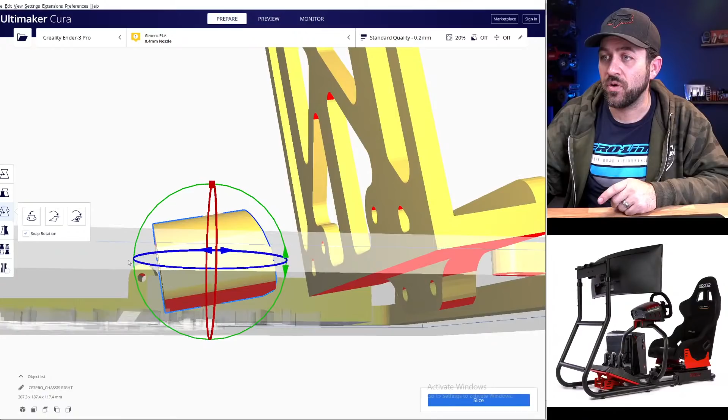Sometimes it will rotate it to an area that you don't necessarily like. Same thing here, this you wouldn't want to print this way. This way, you'll actually want to print it on the back. So if you use that lay flat option here, it wouldn't do it the way that I wanted. It laid it that way, where I would rather have it laid down this direction.

Now we still have the big phone holder. Again, rotate, we're gonna drag it back. That's still not the proper area, but we're gonna hit lay flat, which does rotate it properly. And then we just need to move it into place.

Now you wanna make sure that your items aren't colliding, of course. And you can do that by just rotating around and, ooh, I didn't notice that that was at an angle. But you can see now everything's in a much more appropriate place. Nothing is, oh, these two are touching. You don't want that.

So you could print all of those items at one shot pretty easily. Now we do still have this guy here. That's probably not going to fit in this build plate, so we wouldn't print that at the same time. But I would have this set up.

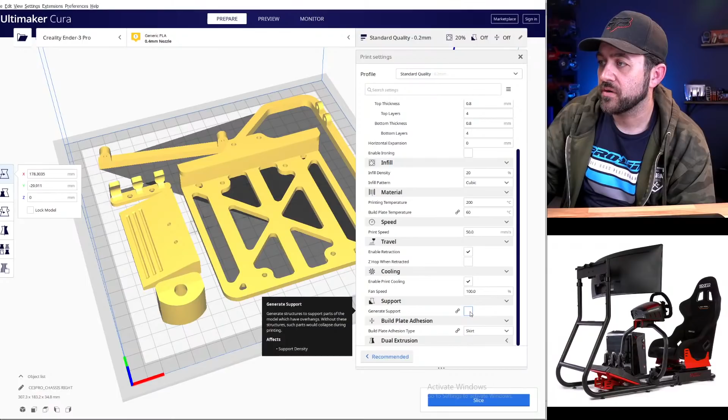Now in my quality drop down up here at the top, you will want to turn on support for this because it is going to need some support over here and likely for this overhang on the phone holder. This won't need it. Everything else should be fine. It may print support on the inside of this, but that's fine too. That shouldn't be that bad.

We'll support everywhere, overhang 45. I'm not 100% sure what the Enders do without a problem. But really that's kind of the base. You can get into a ton of different tuning on this. This is not the machine I use, Ender 3, so I don't have any of my settings carried over to this. But you can click the little gear and it'll give you a bunch of other different types of supports and support tuning that you can do. If you're new to it, you can start with the basics and then tune from there if you'd like.

Oh, it also needs a little bit of support on this backside. Someone's saying I could never learn this.

You absolutely could. How do you rotate the view like that? Oh, I'm right clicking on a mouse. If you're using a laptop, it is much different if you're using like a trackpad. But if you're using a mouse, absolutely, just right click and you can rotate around. Very handy.

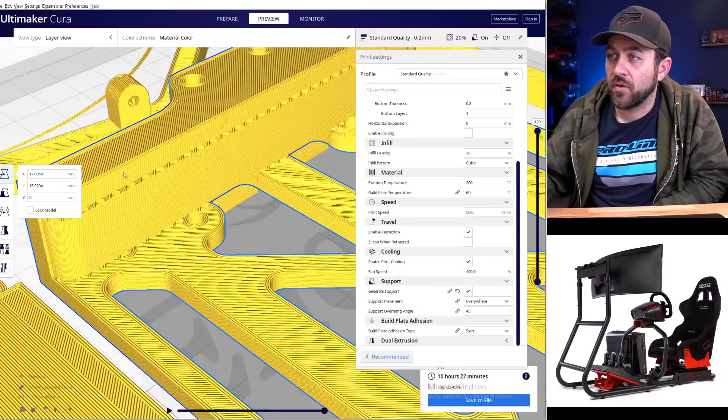So you do that and then you would hit slice. And it'll go through, you can see it chugging away down there. Now you can hit preview and it'll show you where it's showing support. So here you can see the support all through this area because that's not the model. You can see the support on the back side right there.

It's doing support inside of the holes, which really isn't needed, and you can tune that out later with overhang and all of that, but it's just a matter of, it'll work fine. Just a little bit of additional cleanup that would be needed to get it done.

So then all you would do is you would hit save to file, or if it's your computer's directly connected... I print via an SD card, so I would save that to my SD card, put that in my printer and hit print, and then you would be good to go. But that's a little bit of how orienting things around like that works out.

If you hold the wheel, it will move the whole plate up and down. Wait, if you hold the wheel, I don't know which. Oh, yeah, you're talking about pan. Yes, this is pan, or you can zoom with the wheel, and then right click allows you to orbit. If you hold the wheel, yeah, it allows you to pan. It doesn't necessarily move the plate up and down, that's just what that's called in 3D modeling: panning, rotating, zooming.

Absolutely, though, get a mouse and keyboard. Or a mouse. Keyboard's already on your laptop. A mouse is definitely needed.

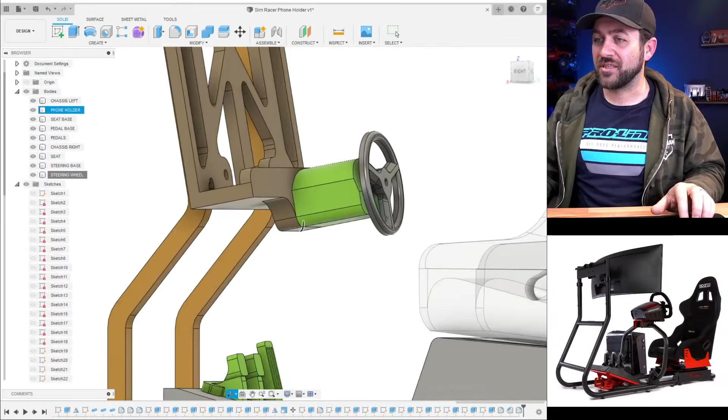Should we rotate it down a little bit? Like that? Yeah, all right, that's put into place. Let's scale that thing up a little. 1.5 - oh, I don't have, I have non-uniform. Uniform, 1.5 - oh, too much, too girthy. 1.2, there we go.

What is the print time on those parts? I did not check, but it was 10 hours on what we showed previously. That did not include the other side of the chassis or the seat base or the steering wheel.

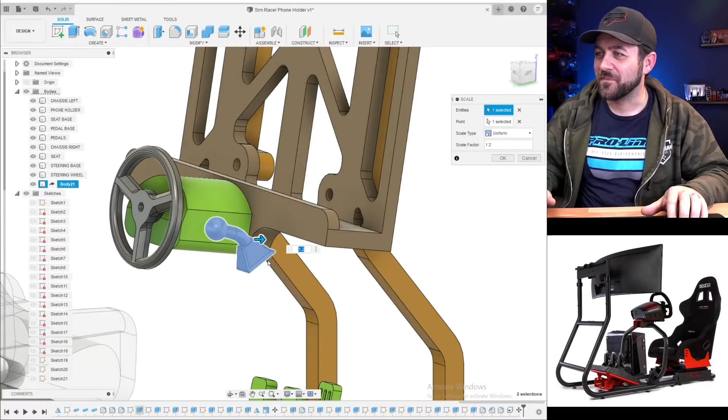So we've girthed it up a little bit. I'm going to break the link so that we can do some editing on our own. First thing I'm going to do - let's see, is it going to allow me?

No, just trying to fill it. I'm just going to fill that hole in from the bottom because I'm going to make it combine into another base, let's call it. Hide that, hide that. We're going to put a base around it, 2.5.

Moose Jaw says, is there a Fusion 360 for dummies? Yeah, Lars Christensen has some really good videos. He's an employee of Autodesk, so he obviously has a lot of experience with the Autodesk products and does some pretty decent videos, especially on a lot of the real basic type stuff. It gives you some great steps to go through.

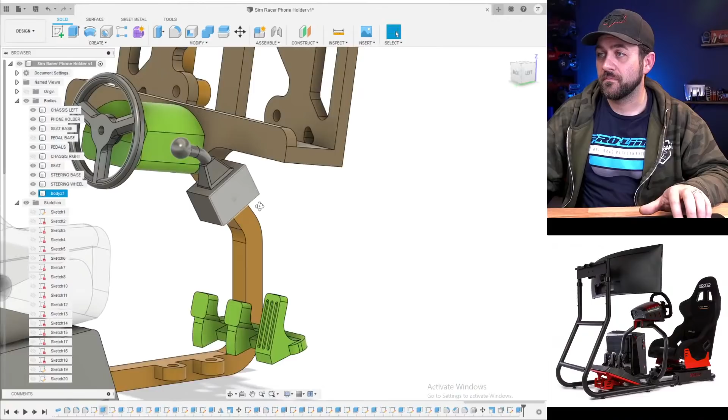For me, it's - I found a number of tips through him, things that, since Fusion 360 is not where I normally work, I'm not all that... I can get around in Fusion 360, I can get what I need done, but there's a lot of things in this program I don't know compared to SolidWorks, where I'm much more fluent. I feel like I'm much more capable of getting things modeled the way that I would like to.

All right, I want to add a mount that will attach to this. So I'm going to throw a little bit of fillet on that first. Yeah, something like that. I'm going to add a mount to get that done.

Let's see, what other things - before I do that, what other things do we need to add to this? Someone said a cup holder, that was not a bad idea, I kind of liked that idea. That probably needs to go on the left side.

Is there a SolidWorks for Dummies? Found a trial and I'm more lost than I am in Fusion. I don't know if there is one of those. I've watched a ton of videos, I've been drafting for a lot of years, so I have a lot of experience in this stuff.

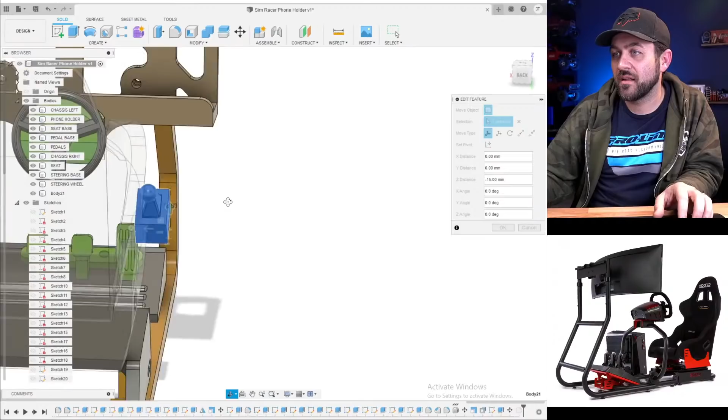It's just - need to move it out a little bit. We could do that. Oh true, yeah, they're usually not behind the steering wheel, huh? I was trying to put it in kind of an easier spot for attaching it, but it doesn't look like that's going to work.

Man, I agree it does need to go out a little bit, but I'm not going to do that because I want it to be simple to mount to this. So we're going to leave that.

Fuzzy dice and an air freshener. As usual, Mike J, that is an unhelpful suggestion. I reject your suggestion.

SolidWorks for Dummies costs $30,000. Yeah, that's about right, SolidWorks is quite expensive.

Mount it off the seat base - that I don't want to. I'm worried about, depending on what seat people actually use, I don't want to make that become an issue.

I know the other ones have the PC tower and tower mount, but I'm not going to add that.

I think for tonight, since we're right at the 2-hour mark, I'm going to finish up a few of these details on my own. I'm going to put a cross brace underneath the seat to get things a little more solid. Air freshener was Phoenix's suggestion, by the way. It would have sounded better when he said it.

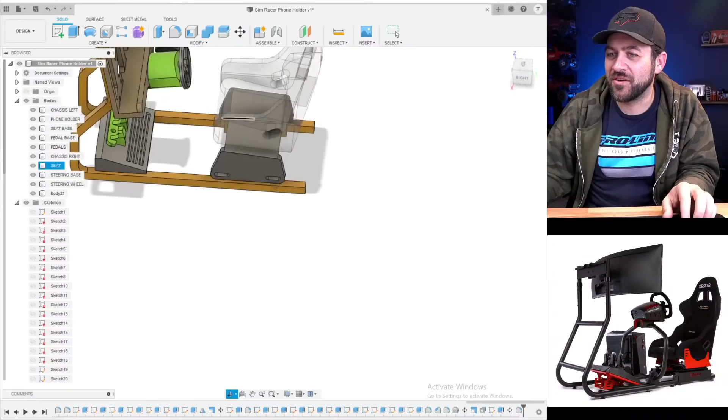What if you add your own seat? Yeah, that's kind of what I'm saying. I don't want to add the shifter in case it would interfere with that. What happened to the cup holder? Cup holder will get added because I liked that.

Windshield turn signal thingy. I don't think they have those in racing simulators.

Hey Jeremiah, Josh - you should print a porta potty. Will VP ever come out with a straight axle conversion for the TRX4? I do not believe that will be something on the VP list. SSD has that already, and I don't see that being something we find the need to work on.

Thanks, Brutus. You're welcome, Mike J.

Okay, so I'm gonna work on some details. We didn't put an HD logo on this anywhere. The side of the seat base, right? That was the suggestion before, which I thought was a good one. Text - text is going to be HD. Oops, I still have caps lock on. Impact font.

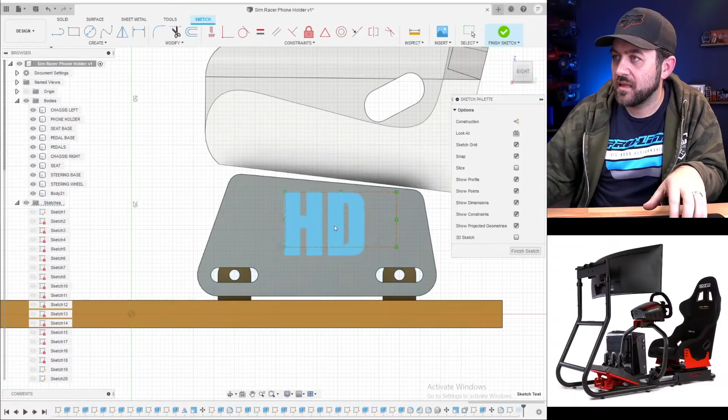20. Fits like a glove. Finish. And we're going to go -0.4, little cut. Actually, I feel like that's too big - it's going to get covered by the heads of the screws. So we're going to go 15. 15 it is, that's better, less terrible. Not gonna lie, this hasn't been my finest night of drafting, but you get what you get.

Select that, mirror it based on that. God, I forget text doesn't mirror for crap. All right, we're only putting it on one side.

Hey Moto Terra Off-Road, hey Harley. I've really been loving these.

Question: are all your designs on Thingiverse able to be sold commercially? I don't know technically how I have them listed, but I really don't care if people download and sell them. Actually, I've seen people do it before without asking, and I've said it on here before - if you need to convince yourself to buy a 3D printer, you need to have things to sell, you can sell these. I don't care. If I put it out there for free, I assume people are going to make them. The point of me doing it is more for this stream, so after this stream is over, I assume they're public property almost.

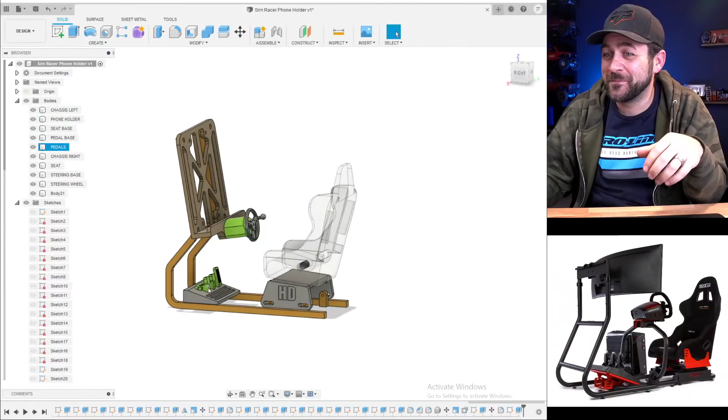So there we go, I think that's going to do it for this stream. I'm going to work on some details of this. This was kind of fun, but I want to just finish some things up without dragging this on for another 45 minutes of just fiddling, because then it's not going to be entertaining. Not that this was necessarily the most entertaining thing in the world anyway, but maybe that's your thing.

Any stream that doesn't crash is a good night. That is true, we didn't have any crashes. We did drop some frames - I see 3,600 frames, but it's 0.8%, so not terrible.

Headlights, you guys are crazy. We'll see - this one was fun, I enjoyed it, but I'm going to get this wrapped up, add some things, and yeah.